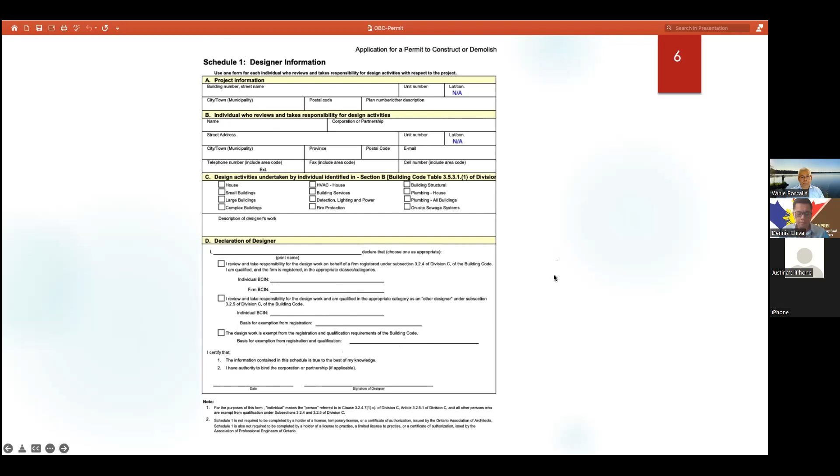Okay, and Schedule 2 is about the septic installer. So if you have a septic system, your septic installer needs to fill up this information, and the applicant for the permit needs to sign this at the bottom. So it can be either the owner or the septic installer who can sign this form.

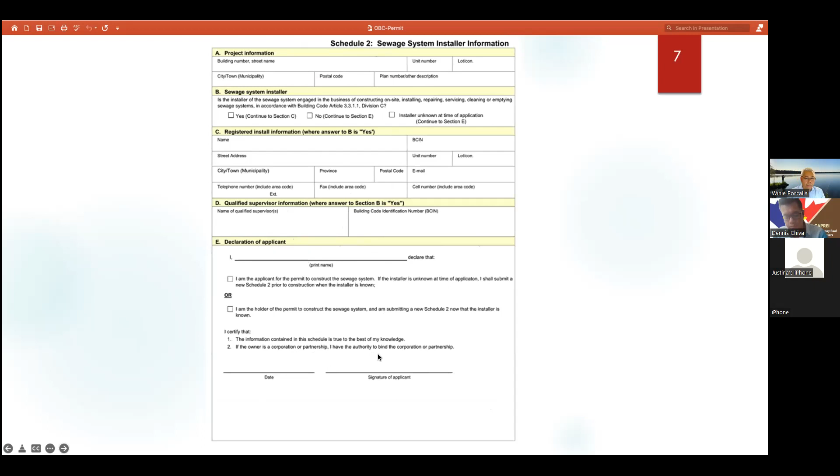Okay, let me also show you the next topic here. This is regarding a permit. When you submit a permit, there's a certain number of days wherein the building department needs to issue the permit or refuse the issuance of the permit.

So item 1 is about a house. Kung ang application is for a house, they have 10 days to issue or refuse the permit. When they refuse the permit, they have to specify what's the reason behind it, why they are refusing it. So maybe you're missing some information, or the drawing is not complete. So they have to provide the reason why they are refusing to issue the permit.

So for a house, 10 days. Upon submission, basta complete yung application mo, they have to issue the permit within 10 days. Sorry, let me go back.

For a multi-dwelling unit for residential, kunwari duplex or triplex, it's gonna go to 15 days. This is for a small building, so they have 15 days to issue the permit for that. That's for residential Part 9 building. When you say Part 9 building, they are residential buildings which are not more than 600 square meters in building area or not more than 3-story in building height. So residential building siya, Part 9 building. So 15 days.

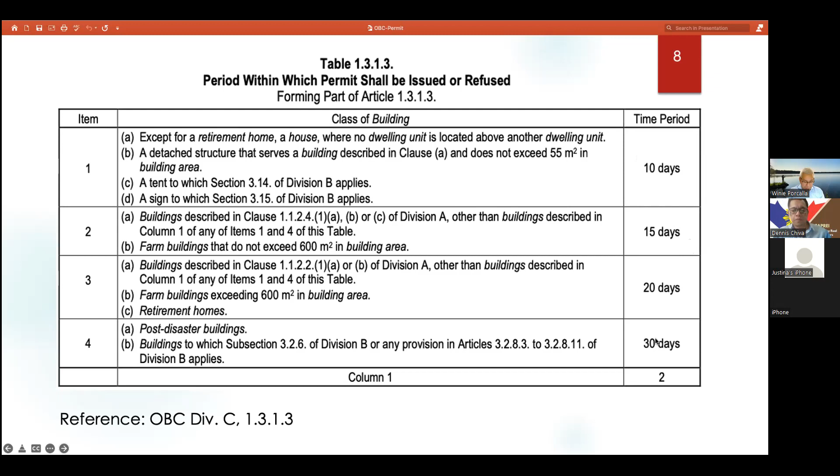Okay, let's move on. So let me just include some definitions here, because these are the three items that's being interchanged most of the time.

So building official, they are working in the building department. Building official includes the chief building official, the plan examiner who reviewed the permit application, and the building inspector. So they are the building official.

They perform statutory function and are bound by law not to deviate from the OBC. So as a building official, we were hired by the HR, but we need to be appointed by the council. So we are appointed employee. So in every town, they create a bylaw and they appoint us to be a building official. So ganun ang process.

As a building official, we ensure that the construction is completed to a minimum standard. Okay, just a minimum standard. So those are the building official.

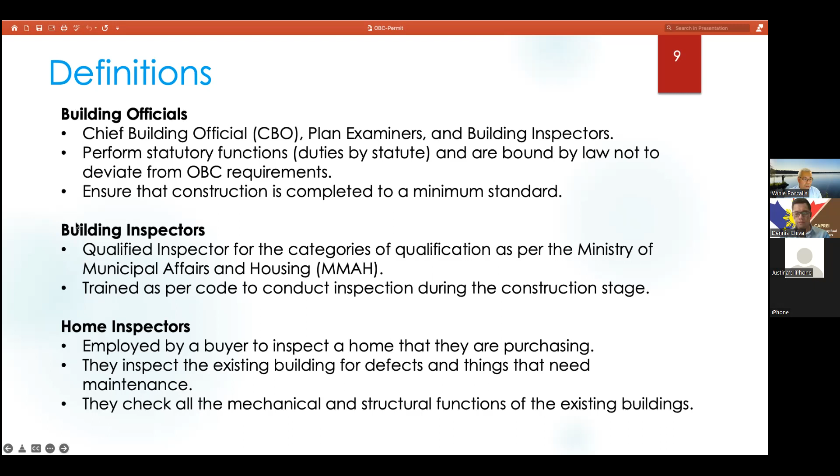Okay. Okay, let me define building permit. So as per the Building Code Act, Section 8,

no person shall construct or demolish a building or cause a building to be constructed or demolished unless a permit has been issued by the CBO or Chief Building Official. So itong definition ng building permit, no person shall construct or demolish. So take note of the two words here, construct and demolish.

So if you're doing a construction, you need to apply for a building permit. If you're demolishing a building or part of the building, then you need a permit. So these are the two key words.

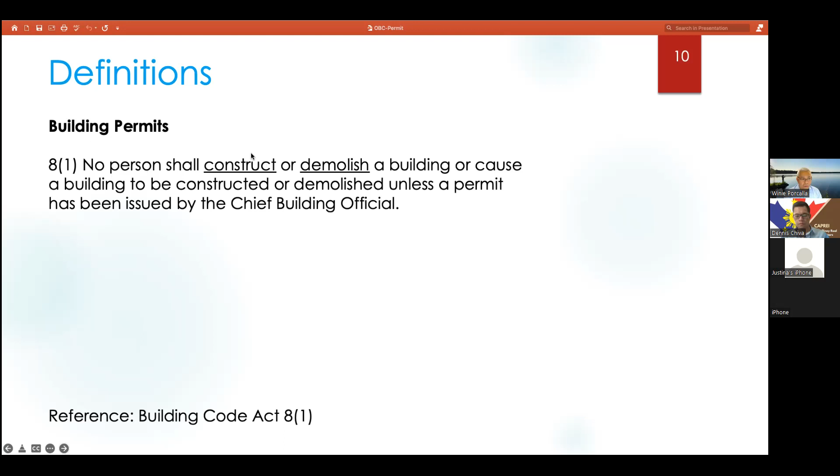Okay, so just take note of that, and then we will define later on or deep dive what's the meaning of construction. May mga exemption to eh. Not all construction you need a permit. But for now, as per the definition, as per the building permit definition or statement, because if you're doing construction or demolition, you need a building permit.

Okay, let's define the Ontario Building Code. The Ontario Building Code is a regulation made under the Building Code Act. It is a set of minimum provisions respecting the safety of a building, with respect to public health, fire protection, accessibility, and structural adequacy. So the building code, minimum lang yan, mga minimum requirement lang siya. You can design your building more than what's required as long as you met the minimum requirement. So minimum siya, minimum requirement lang siya.

And then the third one here, the Ontario Building Code, they are objective-based format intended to promote innovation and flexibility in design and construction. So anong ibig sabihin nito? Objective-based.

So sa building code, meron siyang prescriptive requirement. Halimbawa, what is the height of a guard? So if the deck is more than 2 feet above grade, but less than 6 feet above grade, so 36 inches, yun ang prescriptive requirement. Pero

But if you don't want to use that data, or if you don't want to follow the prescriptive requirement, pwede, as long as you met the intent. Yan ang ibig sabihin ng objective based format. So as long as you met the intent of the code, they might allow you. Okay, so as long as you met the intent, yun ang ibig sabihin niya.

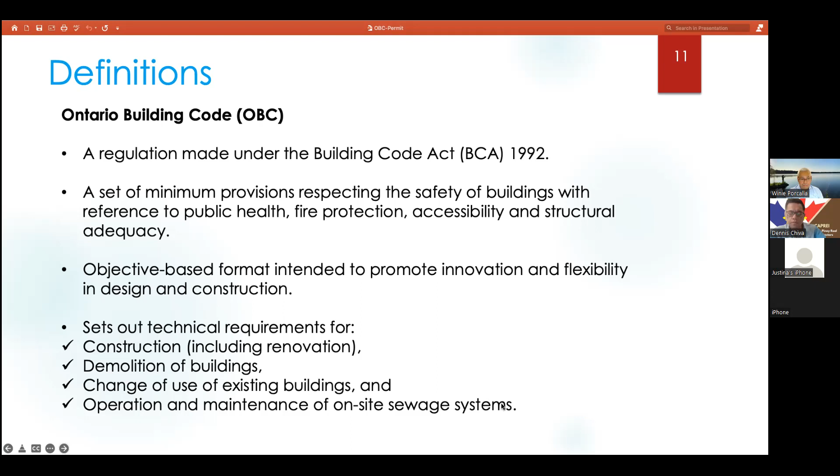Okay, let's define building. Sir, we have a quick question here. Sure, yeah, please interrupt me if you have a question, then I can answer that.

So do we need to go through committee of adjustments for change of use? Ito yung mga parang TRCA, parang meron bang TRCA din dyan sa sa Springwater?

Ang nangyayari kasi yan, pumapasok ka sa committee of adjustment. Pag yung zoning mo, it's only allowed, your zoning for your lot is for residential only. And then you want a change of use, and you want to make the building as an office. So pag hindi siya allowed, dahil nakazone lang siya sa residential, hindi siya allowed, then you have to go to that kind of route. So there's a process for that. So diyan pumapasok yung sinasabi mo na hindi siya allowed because nakazone siya residential, and then you're converting it to commercial, for example. So you have to go that route.

There's a little bit lengthy procedure for that. So there is a process. So merong form, may fees, tapos approval. So yeah, to change, dumadaan yan sa dalawang ina-apply niya, dalawang department. Isa sa building department and isa sa planning department.

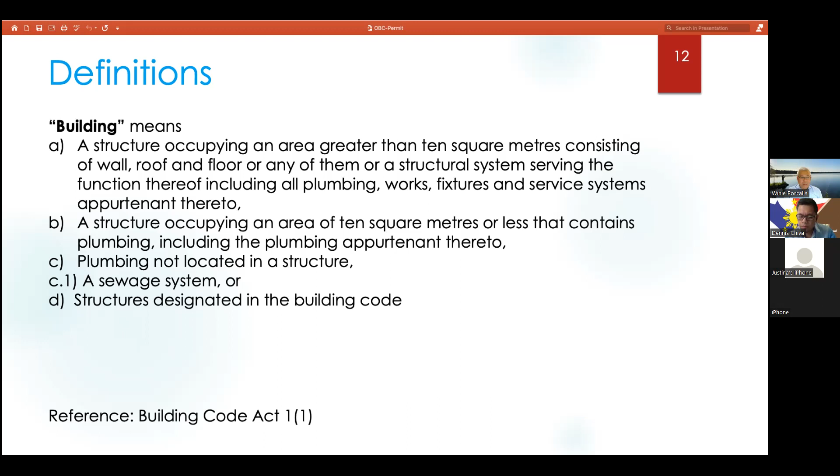That's a good question. Okay, let me also specify the 2 types of renovation. When you renovate, you need a permit, but there are 2 types - one is basic renovation, and the other is extensive renovation.

Extensive renovation is if it will affect the fire separation. For example, in a multi-unit, there's a fire separation between the 2 units. If you disturb that, make a hole, or add a door that affects the fire separation rating, for example 45 minutes rating, it's considered an extensive renovation.

Now, if it affects the early warning and evacuation system, it's also considered an extensive renovation. What is this early warning and evacuation system? Usually this applies to large buildings. It includes access to exit, exit signs, lighting of exits, emergency lights, fire alarm system, and smoke alarm system.

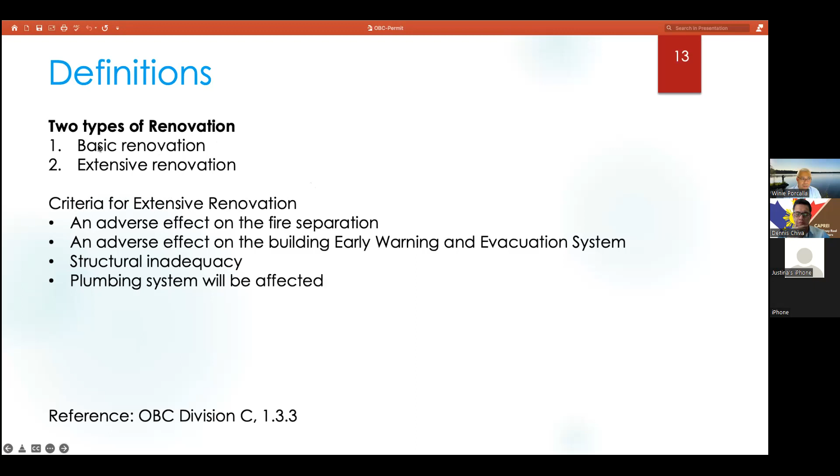So we just want to make sure we all understand that a permit is required for extensive renovation. For basic renovation, some need a permit, not all, and I'll explain later which renovations don't need a permit.

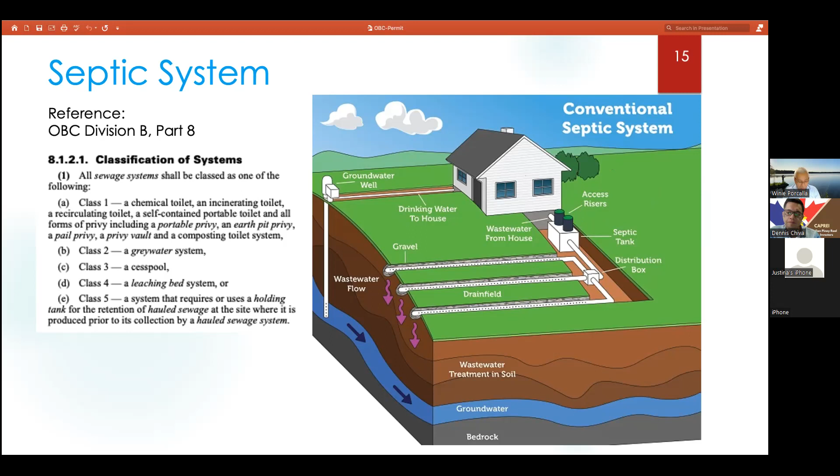Okay, so we're almost done with this one. For the leaching bed system, the discharge from the tank goes to a pipe, and those pipes are perforated with holes. The first layer is made up of clear stone or gravel, about 1 foot. Below that is sand, and below the sand is the native soil. So we usually do a soil test, or they provide a soil analysis for the soil. We have to check the perc time - how much time it takes for the liquid to percolate into the ground. That's the requirement when designing a leaching bed system.

In the Philippines, there's no such thing, no leaching bed. Usually when the waste comes out, it goes directly to the septic tank. The septic tank in the Philippines has 2 chambers - a digestion chamber that's totally enclosed, and the next chamber has no floor slab, so the liquid waste percolates directly into the ground. That's the difference in the Philippines. That's the usual design of a septic tank there.

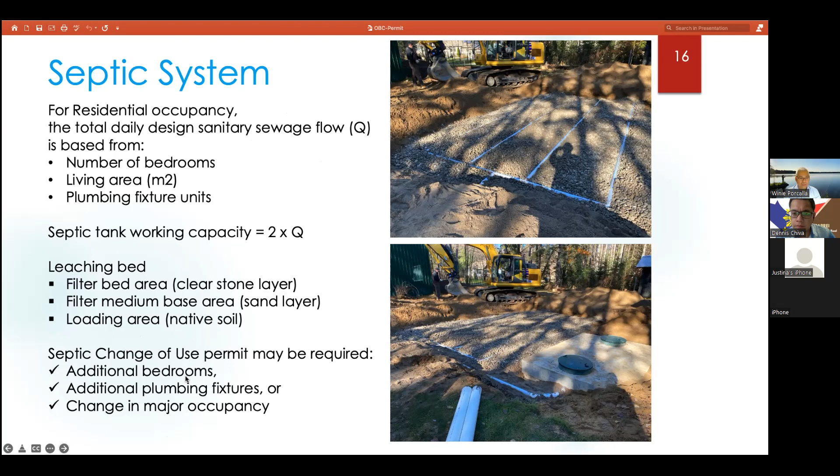The tank should have a minimum distance of 1.5 meters, 5 feet, for the septic tank. Then it goes to the distribution bed. From the distribution bed, we need at least 15 meters distance from the drilled well - we don't want the water source to be contaminated. That's the idea, so we don't contaminate it. And if there's a garden, 5 meters. If there's any structure, 5 meters. For a pool, if there's a swimming pool, 5 meters.

So this is in the building code here. When they submit an application for a septic system, they indicate the clearances from the house, from the property line, from the tree line, from the pool. This is a mandatory requirement. We check this information when they apply for a septic permit.

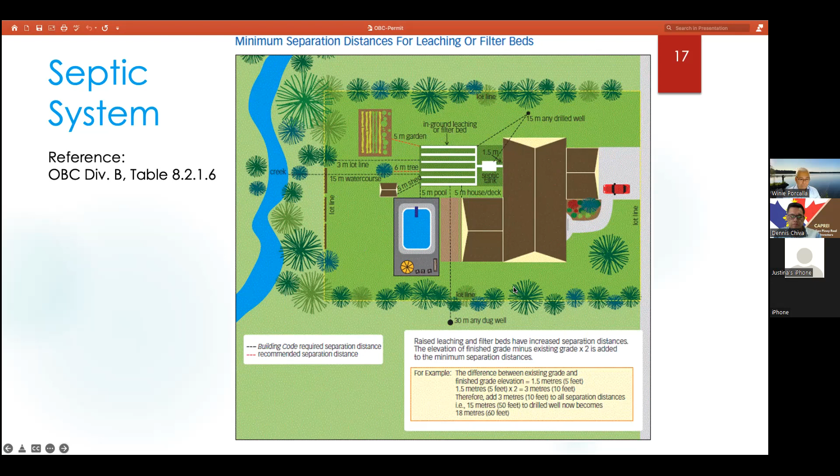Okay, now we're getting to the good part. We're almost at the 1 hour mark. So the question when we started is, when do we need a building permit? So here are the answers now.

Also, if you have plumbing not located in a structure, an example is the sewer line, the sanitary sewer line from the house to the main street. That's also considered plumbing, so you have to apply for a building permit for that. And when you're installing or repairing a septic system, you also need a building permit.

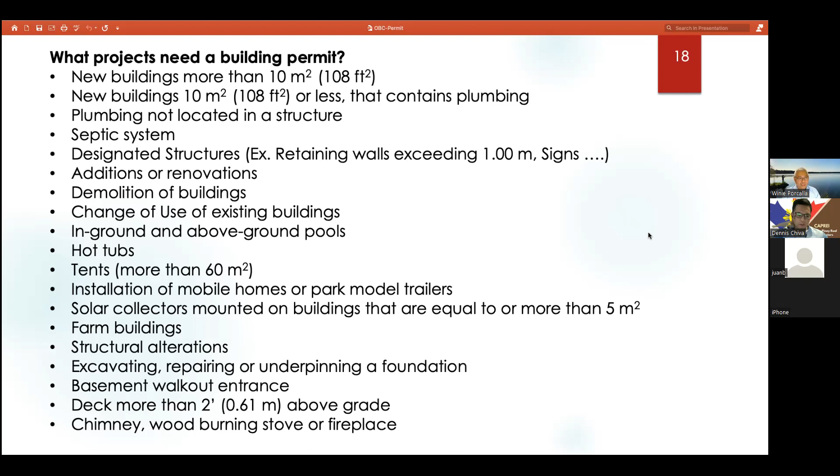Okay, we still have one more slide, I saved this for later. Suspense. Okay, what projects do not need a building permit? Let me just...

Again, this is about renovation. When you are replacing roof shingles, or replacing the eavestrough or siding, no permit needed. If it's just siding, that's fine, no permit. When you are installing an air conditioning unit or heat pump, no permit needed, you don't need a permit.

When you are replacing the kitchen sink or bathroom cabinet without plumbing changes, if you're replacing the water closet because it got broken, you can replace it, no permit needed, as long as you're not touching the sanitary line or the plumbing piping, no permit for that.

And when you're replacing your furnace, if it stopped working, you can replace it, no permit needed. And when you are replacing doors and windows, for example if your door got kicked and has a hole, same thing with a window that got broken, you can replace it, no permit, as long as it's the same size.

As long as it's the same size, meaning the width is the same. Because if the width is bigger, you'll need to replace the lintel beam, and if you're replacing the lintel beam, that's structural, you'll need a building permit for that.

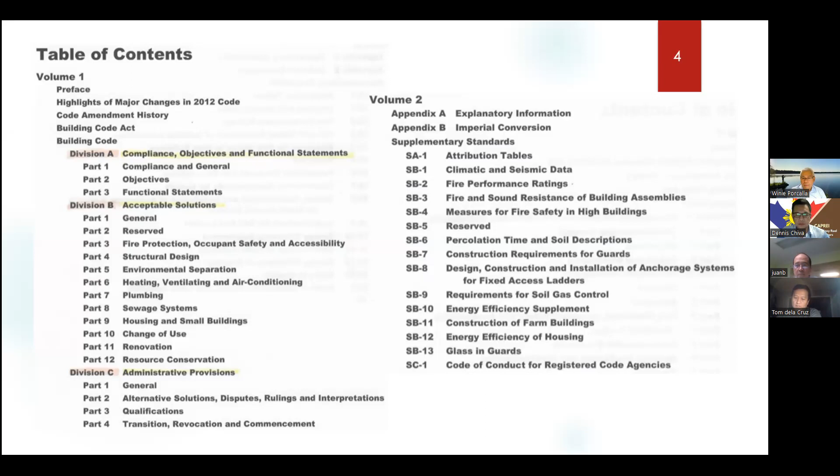Isa sa important thing na dapat maintindihan ng ating mga kababayan, mga real estate investors, yung building department o building inspector, kakampi mo yan. May certain fee, pero they are just doing their job, it's a minimum requirement lang siya. Gamitin ninyo sila to your advantage, make sure na kung anong binabayaran mo bumabalik sa iyo ng tama. Hindi yung mag-rely ka lang sa contractor na itong gagawin nila, minsan napapamahal ka lalo, hindi naman kailangan ginagawa nila, tapos sina-charge ka. So building official, they are on the owner's side.

If you have questions sa proposed renovation mo or proposed projects, magtanong ka sa building department. It's free, you don't need to tell them exactly the address of the property. You can just ask a generic or general question, like what do you think about this or that, or anything. Pwede kang tumawag sa kanila and they will try to answer as much as allowed, unless masyadong personal ang tanong mo, kailangan ng privacy information, may babayaran na small fee para makuha mo lahat ng data about previous files about the project.